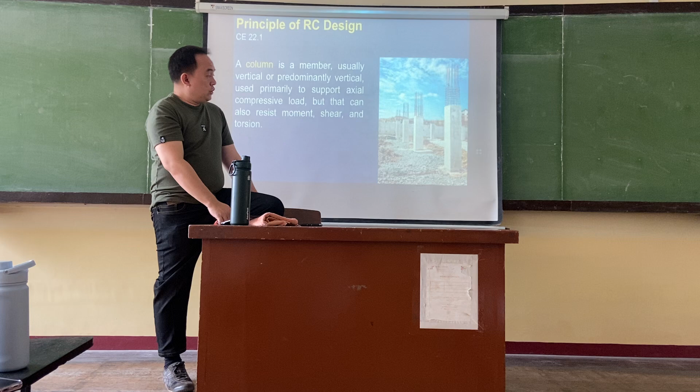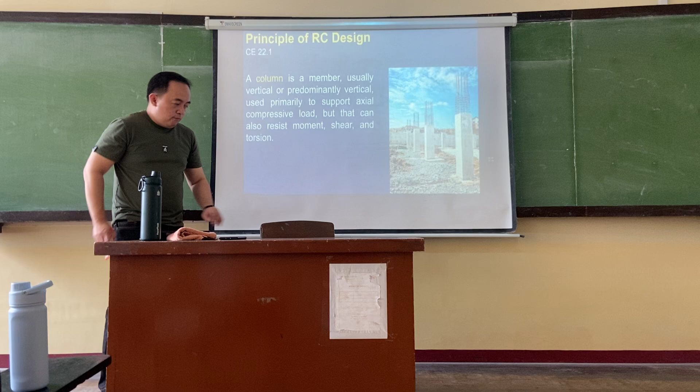Okay. So, by definition from our NSCP, let's define this technically. Your column is a member, and it is usually vertical or predominantly vertical.

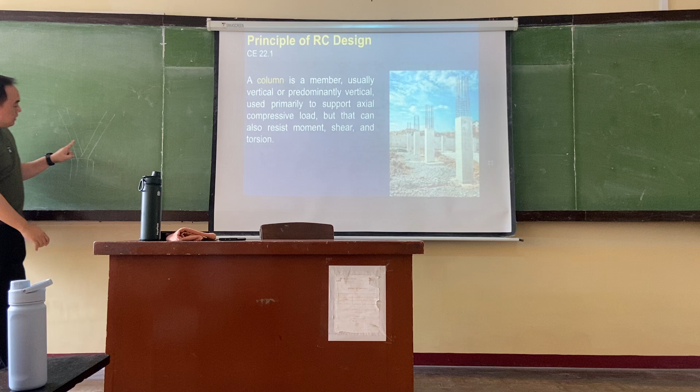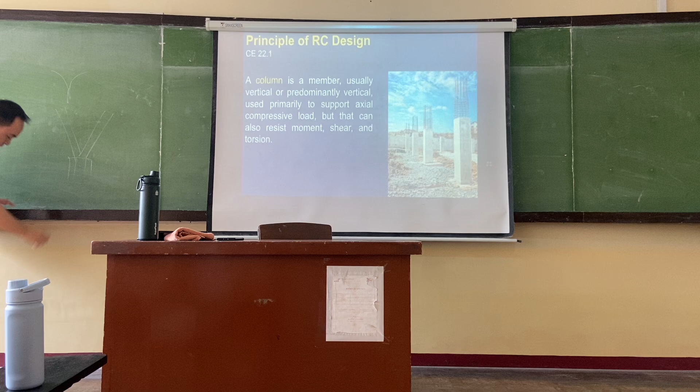Those are reinforced columns, reinforced concrete columns. So, yeah, something like that.

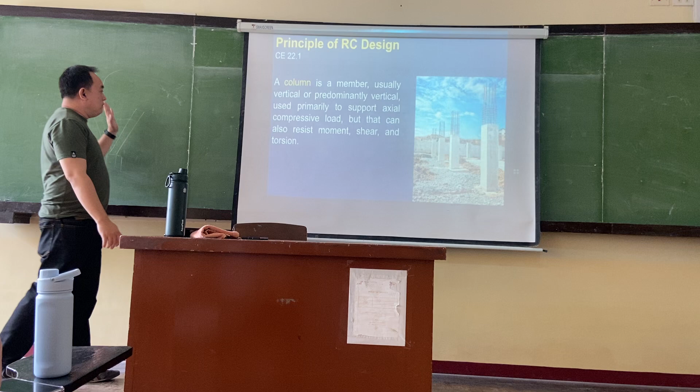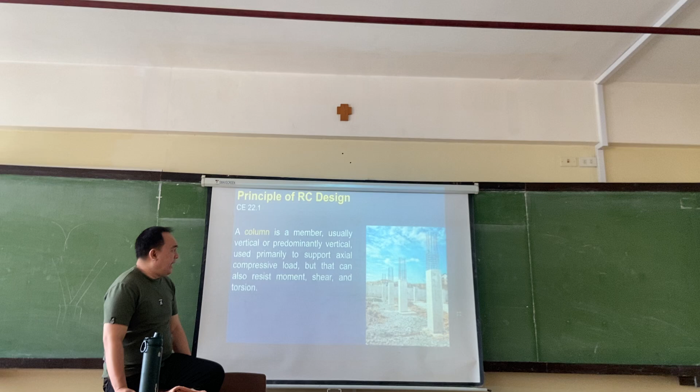But still, the action should be supporting the vertical axis of your structure. Okay? And obviously, this is used to support your axial load.

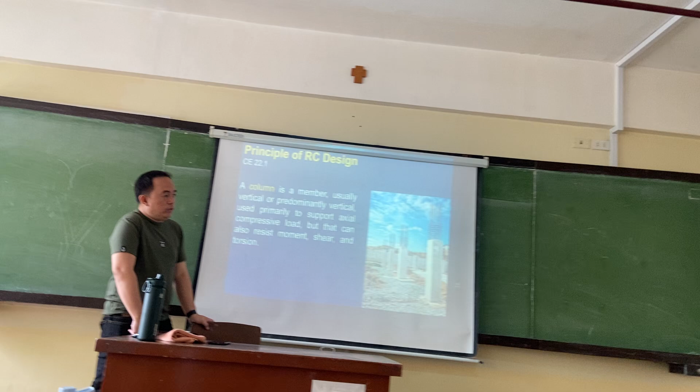Really, it's called tension. Okay, there are cases in which your columns will be in tension. Okay, so if you recall.

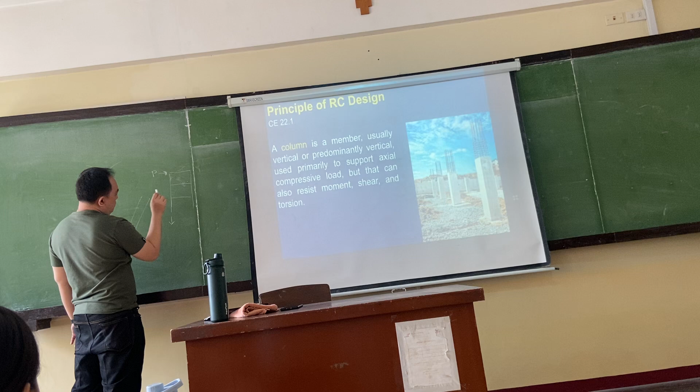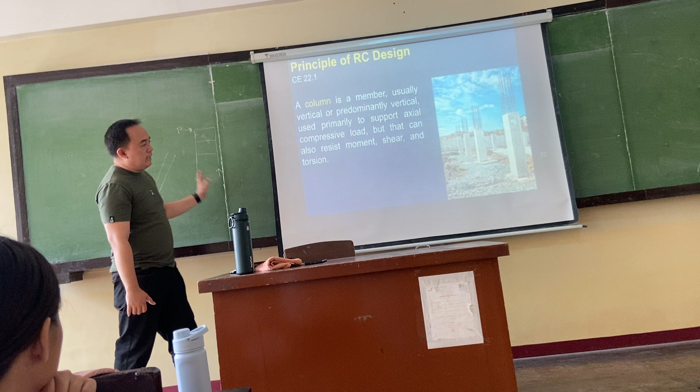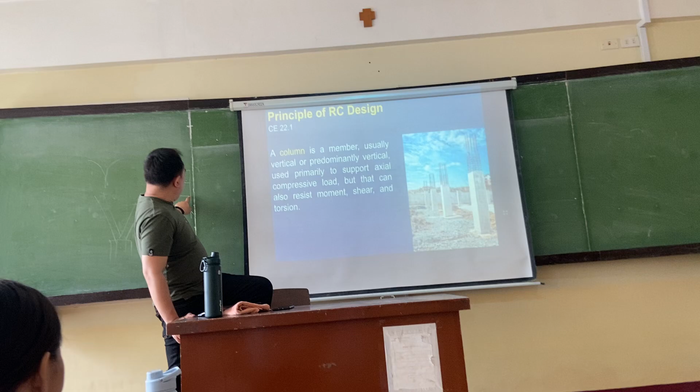But we will still decide if it goes into compression. Okay, so yes, it will resist moment. Of course, if the condition is rigid, there should be resistance to moment, and your shear, of course, as well as torsion.

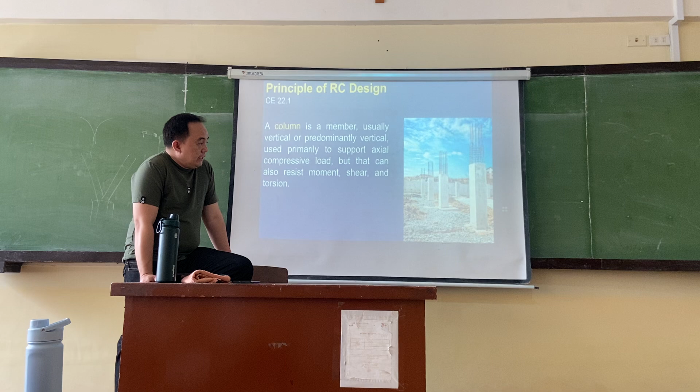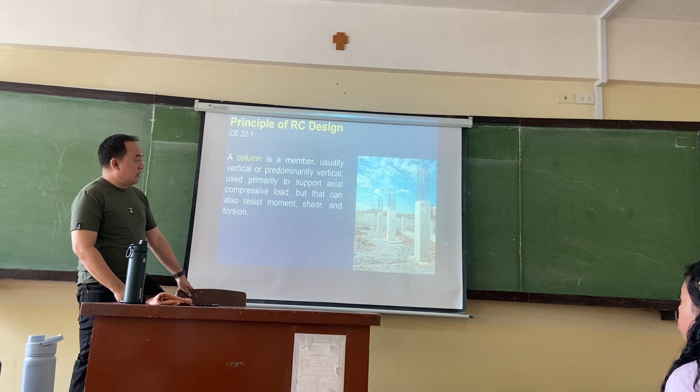Okay, so I don't think we will be able to fully discuss the parameters for torsion, but they're related, there might be changes or differences in the equation, but the idea is the same. So you provide stirrups where needed.

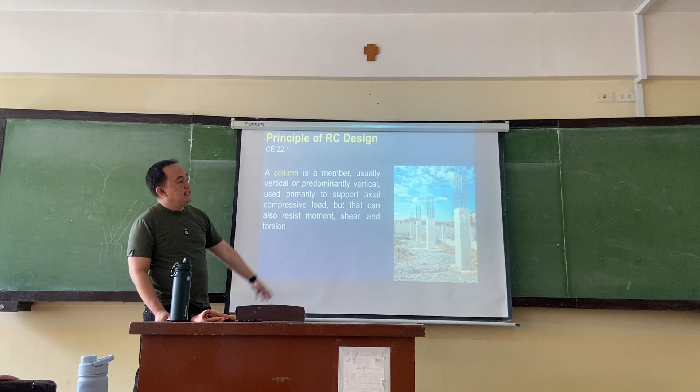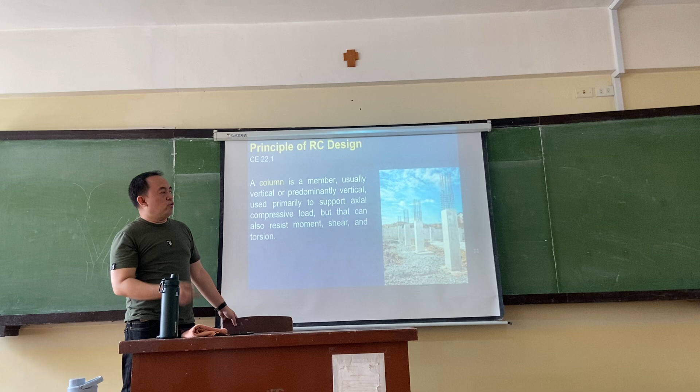And by the way, for columns, we call that ties, lateral ties. So the stirrup has a similar function, like a group of beams with stirrups. So for column, we call them ties, or hoops.

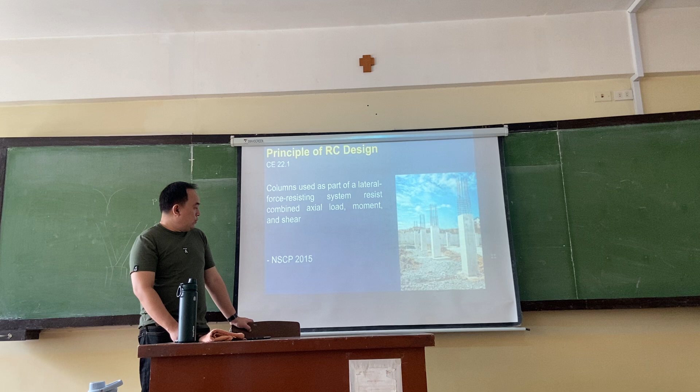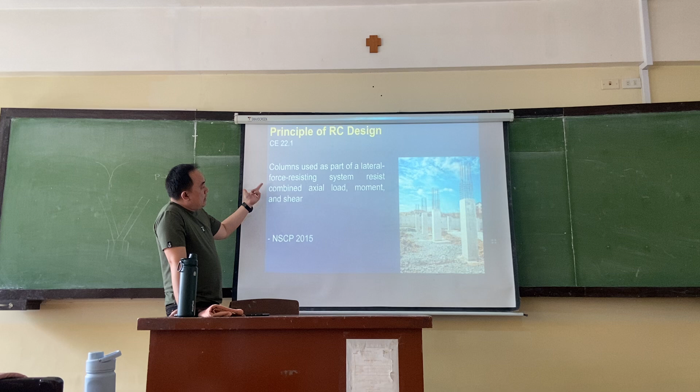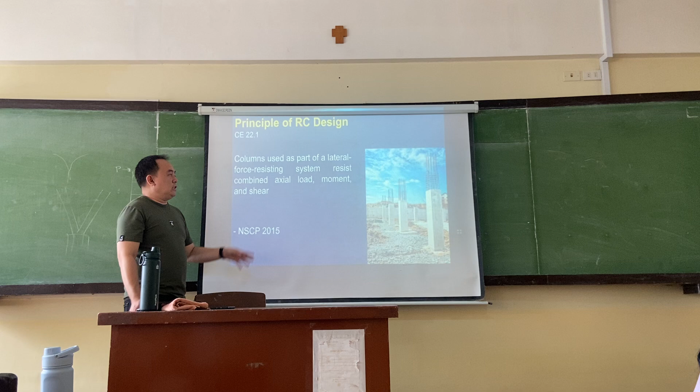Later, mentioning the hoops of our circular columns. Okay. So again, that's a definition from NSCP 2015, and in addition, your columns are used as part of the lateral force system, resisting lateral loads. That's why you have axial load, moment, and of course your shear also.

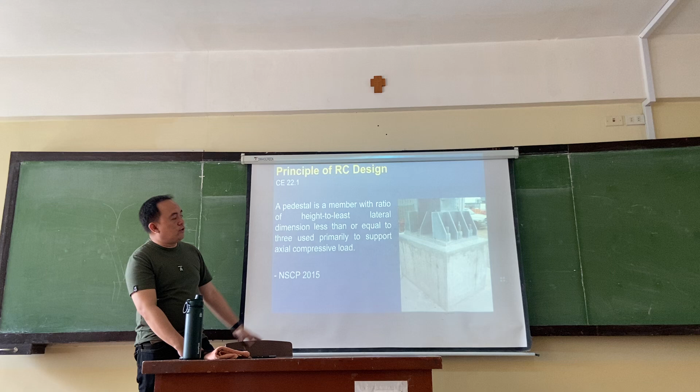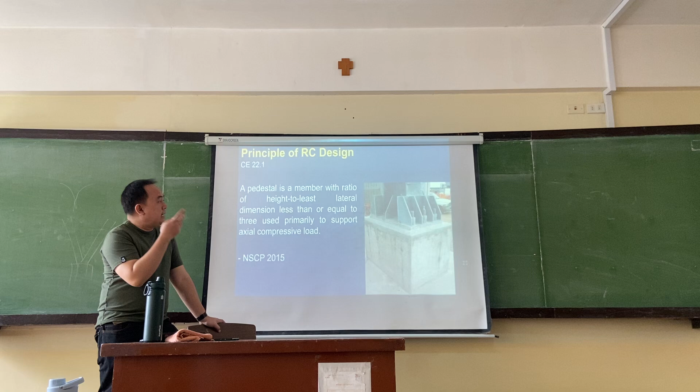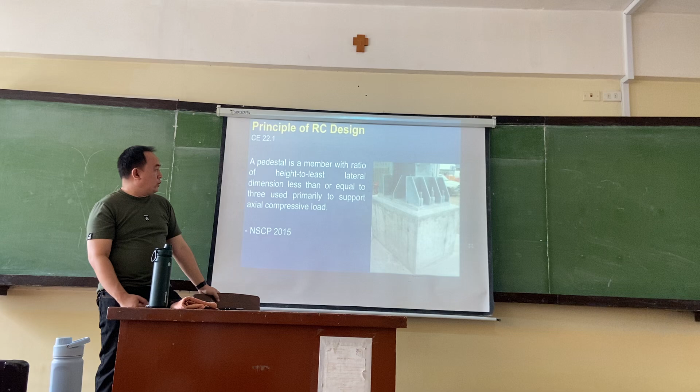Aside from column, you also have this - it's still column, but for us it's divided differently. That's your pedestal. Pedestal is a member in which the ratio of height to least lateral dimension is less than or equal to 3, and it's used primarily to support your axial load.

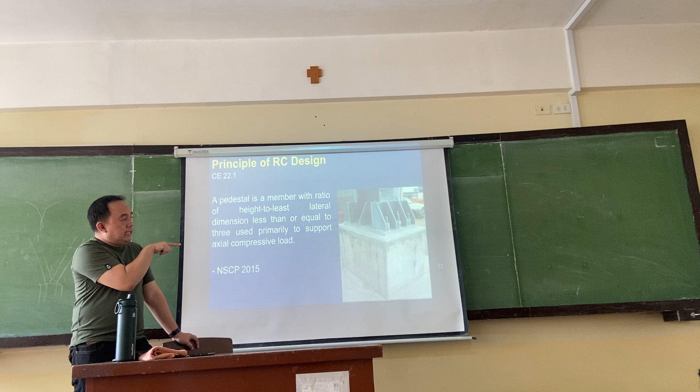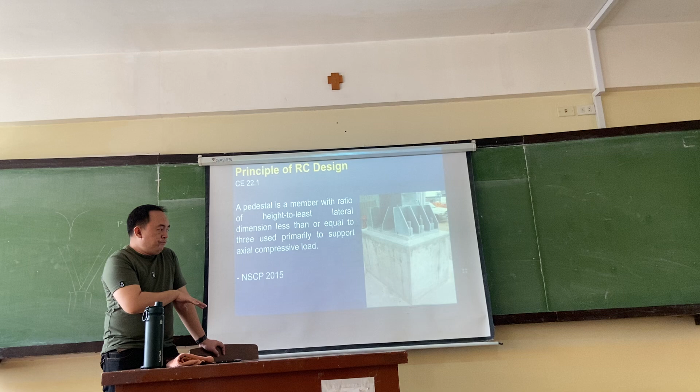So it's common to see this in steel structures. To prevent your steel columns, your base plate, stiffeners, and more importantly, your bolts, from touching the ground - even our steel might touch the ground - so we elevate it, and that elevation is by means of the pedestal.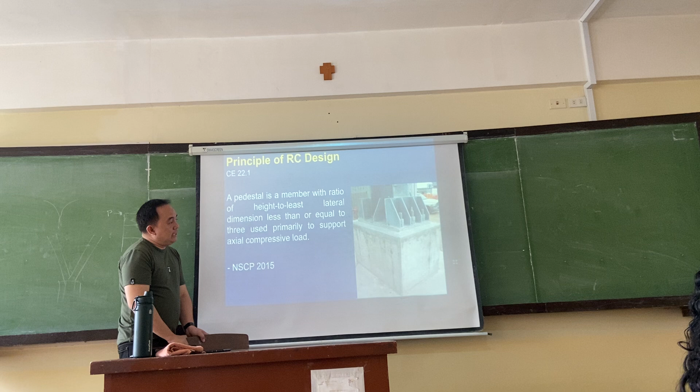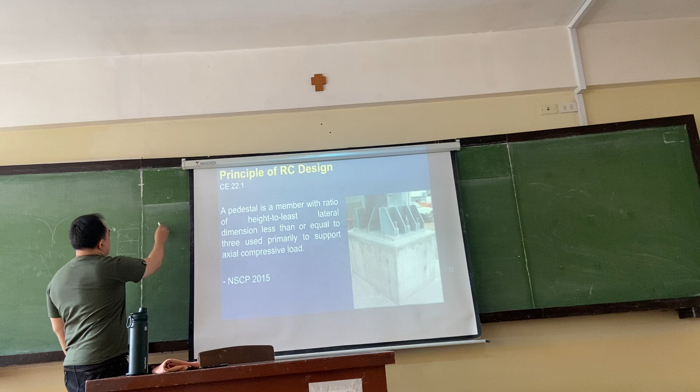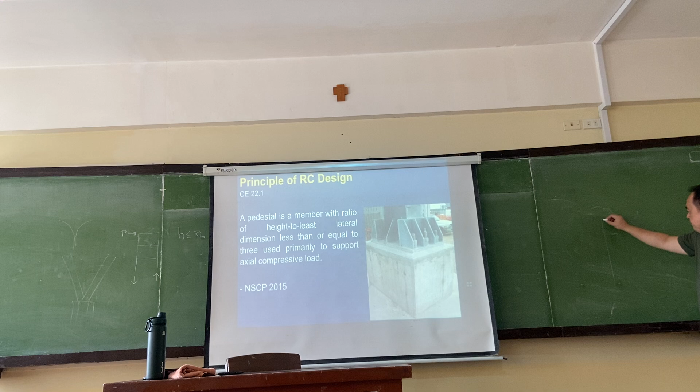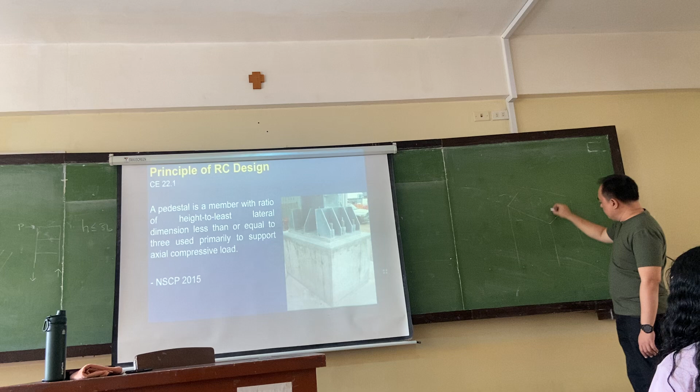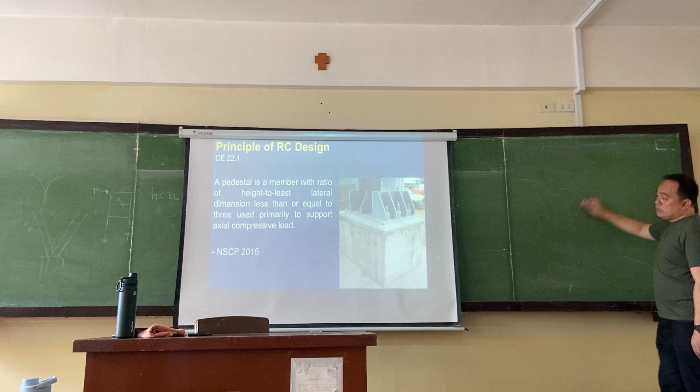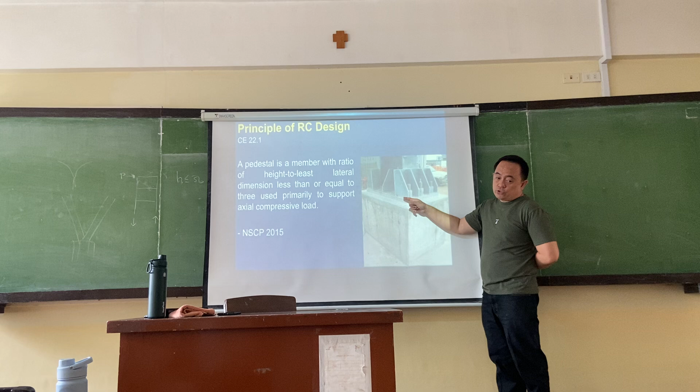If it's not critical, it won't pose a great threat even if it's just a small structure. But for serious structural work, it's properly designed. Of course, any computation should be including this steel consideration too, so we can accommodate it - in your board review, it might be discussed.

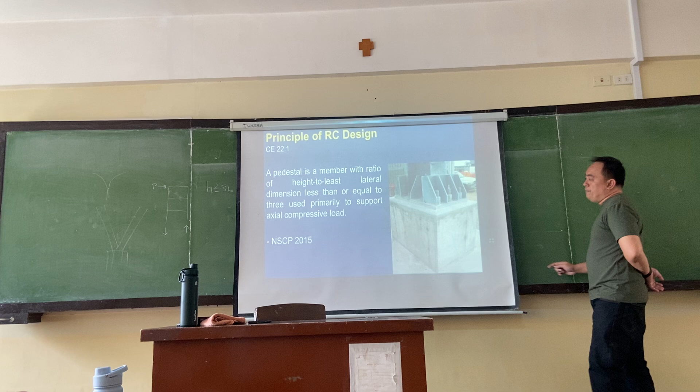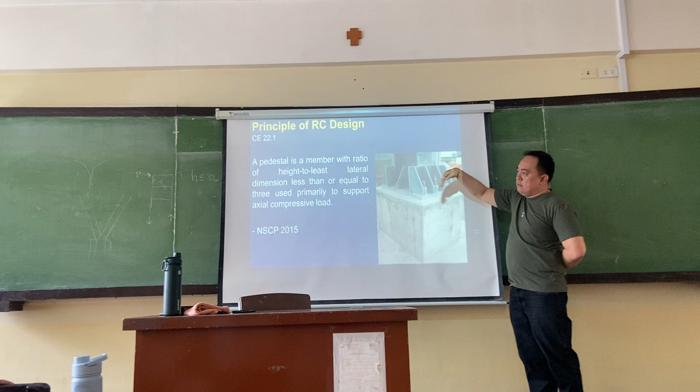Anyway, it's simple - this is just force over the area. You get the thickness, the force comes from the column, and then strength is force over the area. There's a required stress, so it's similar. It's basically simple information.

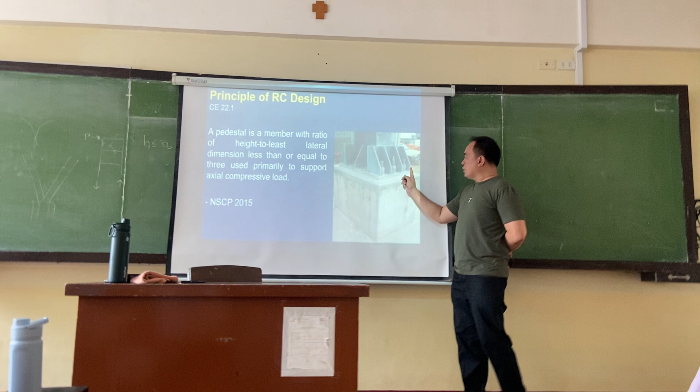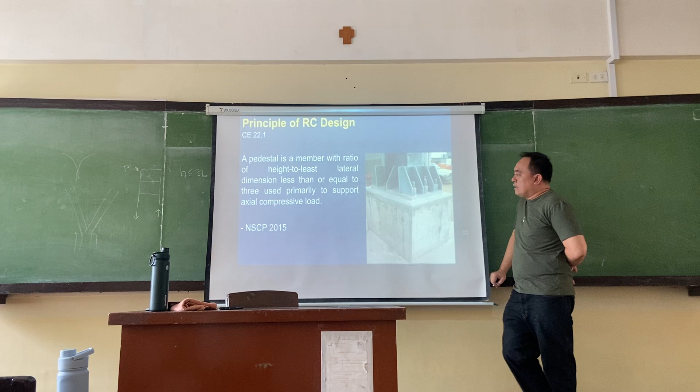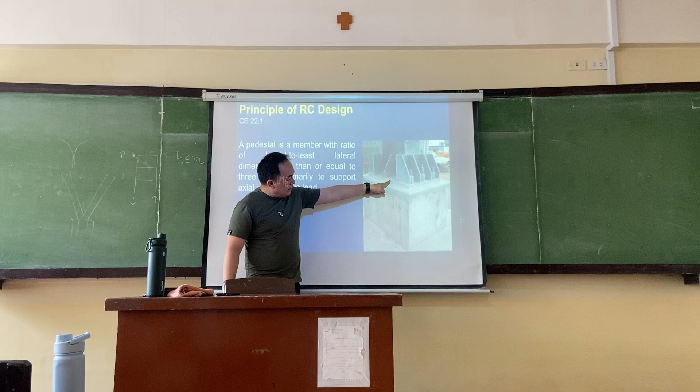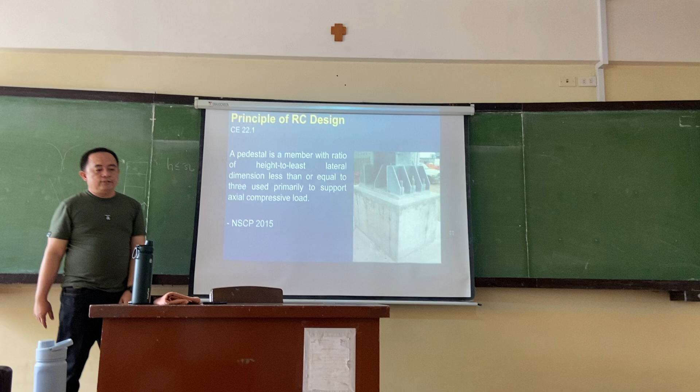Moving back to our question - so they're just resting there, the base plate with the bolts, and then it's embedded down below for the footing itself. So it's buried, basically, depending on the structural engineer.

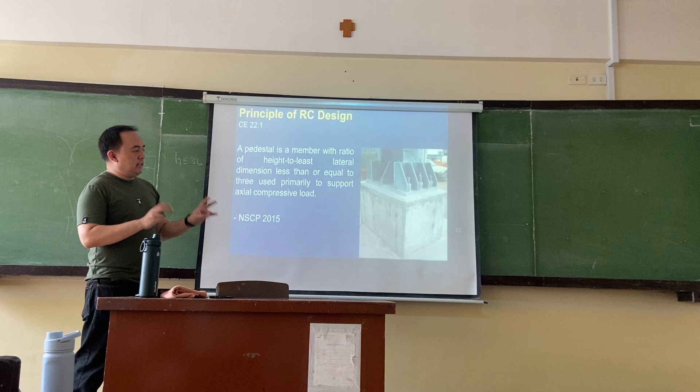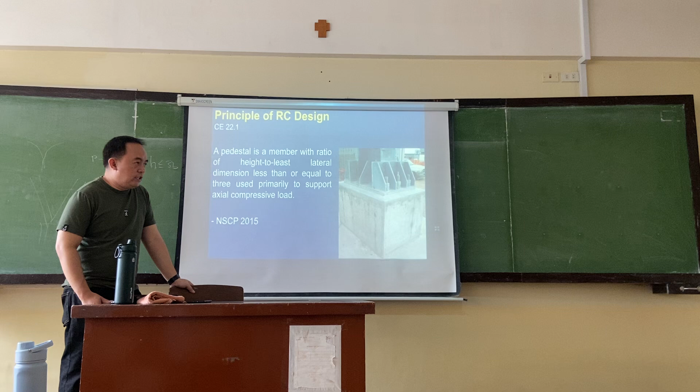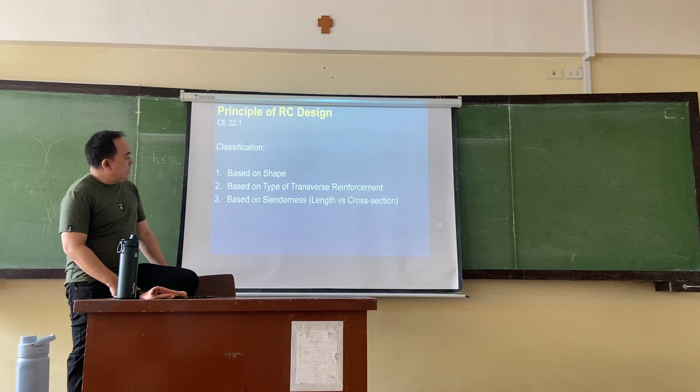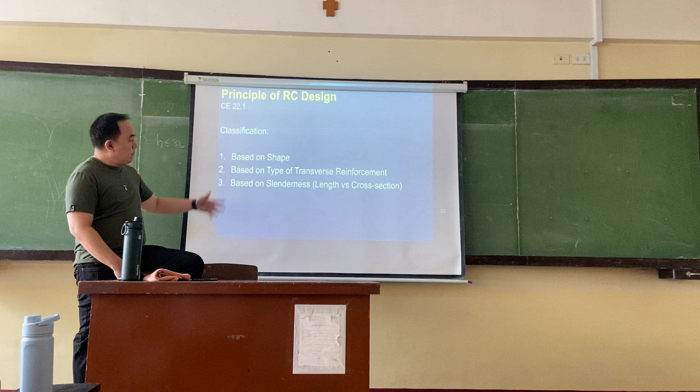In your steel sections, there are wide flange, bars, channels. For our RC (reinforced concrete), we will also base the classification on the shape, and we will classify our column based on the type of transverse reinforcement.

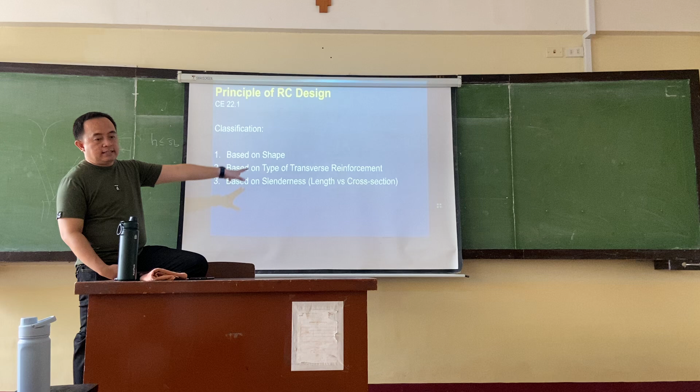Meaning spirals, or lateral ties, hooks. And then also based on the slenderness - whether it's short or long, slender. That's actually length versus your cross section. And for steel, we have our elastic and inelastic buckling.

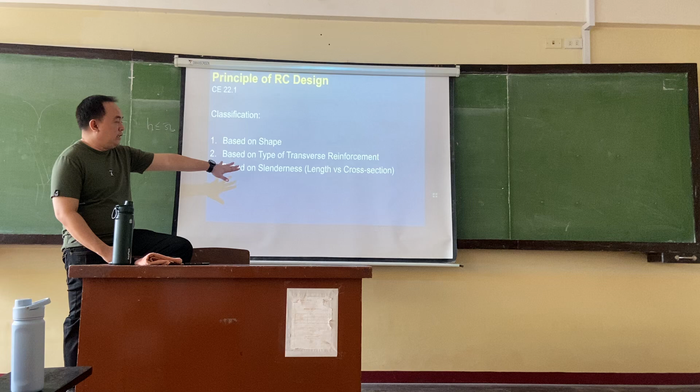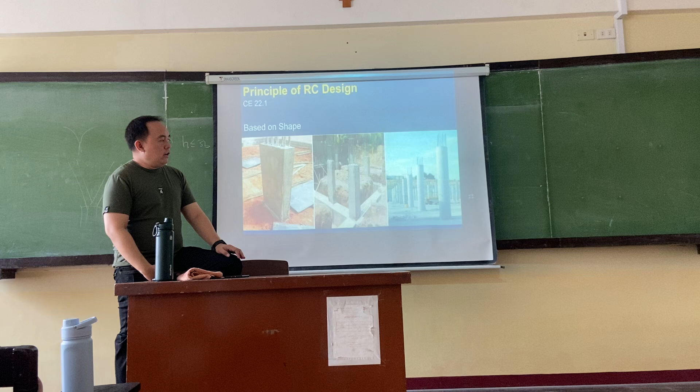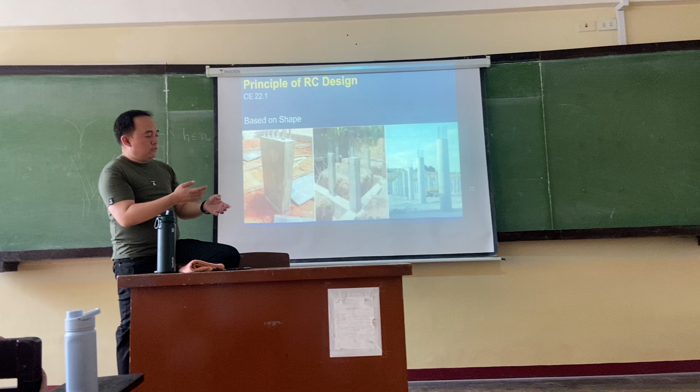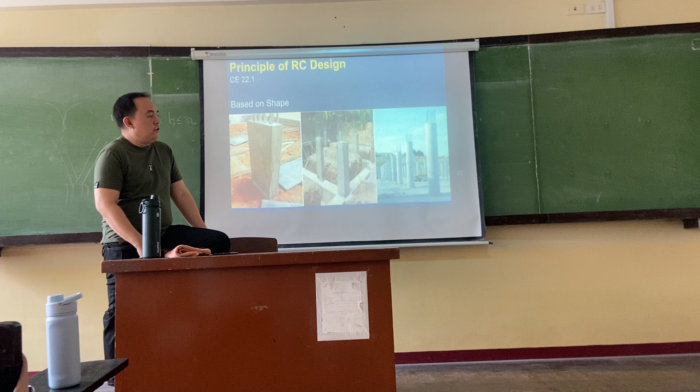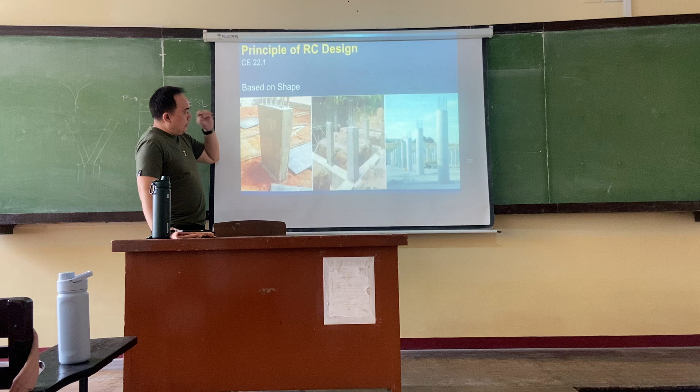They follow the standard code. That's why I lean toward circular columns, although what's notable about circular columns is that they have a more uniform moment of inertia, unlike rectangular ones where on one axis it's strong, but on another side it's easy to bend.